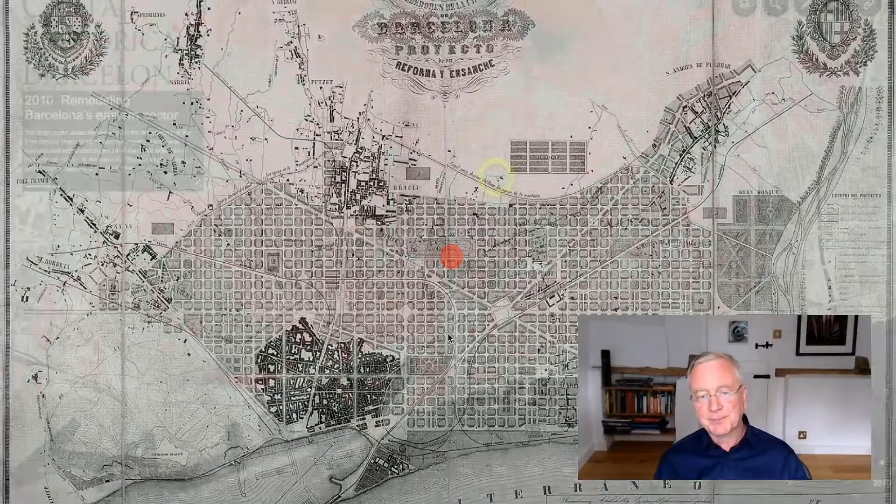If we look today at the city of Barcelona, we find they have pursued faithfully that plan, at least in terms of block layout and chamfered corners, although nowadays almost every block is built on all 4 sides, and the public space has become private, if it exists at all. Sometimes it's built completely. But again, you see the position of Sagrada.

When Sagrada started, when the devotees of St. Joseph, a private organization, decided to build a church in 1878, this area was light industrial, slightly agricultural, and had virtually no construction. It was not yet incorporated into the city of Barcelona at all.

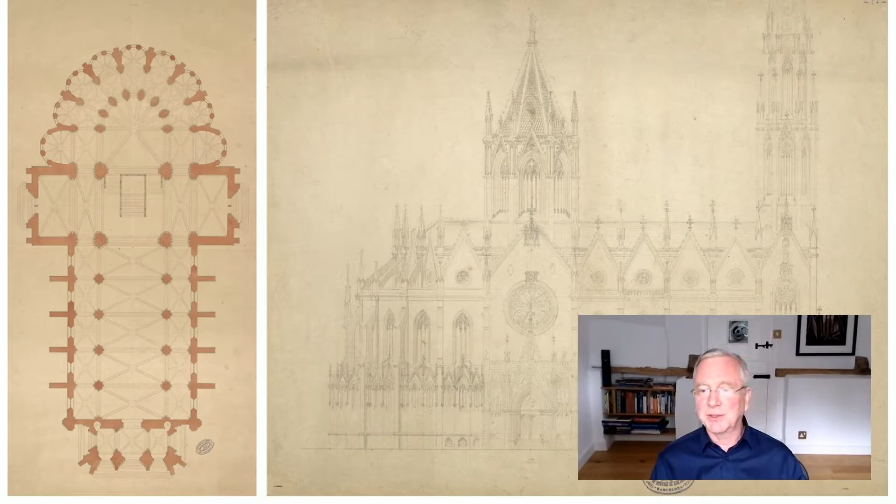The devotees of St. Joseph originally employed an architect called Villar, who designed for them a very classical Gothic church, fairly sizable but not enormous. That church started construction, and the crypt was built to the extent you see before you today, when in 1882 Mr. Villar and his client had a disagreement and he resigned from the project.

Whereupon the client, the devotees of St. Joseph, took the extraordinary step of appointing Antoni Gaudí as his successor. At that time, Antoni Gaudí was only 30 years of age, and the only thing he'd built so far in his career was this glove stand for the World's Fair of 1878. So they decided to entrust their amazing project to this unknown architect.

Of course, Gaudí went on to become one of the most famous architects in early 20th century Europe. This is the house he built for his patron, Mr. Güell, Palau Güell, for example. This is a shot of one of the outbuildings at Park Güell, which was an experiment in urban living - what was the ideal way for the middle classes to live at the turn of the 19th century?

It's probably his most famous individual dwelling, Casa Batlló in the center of Barcelona. You can see here that at that time, Gaudí's style was very closely aligned with the arts and crafts movement, for example in the UK. It was very much about craftsmanship, about decoration, about organic forms and shapes.

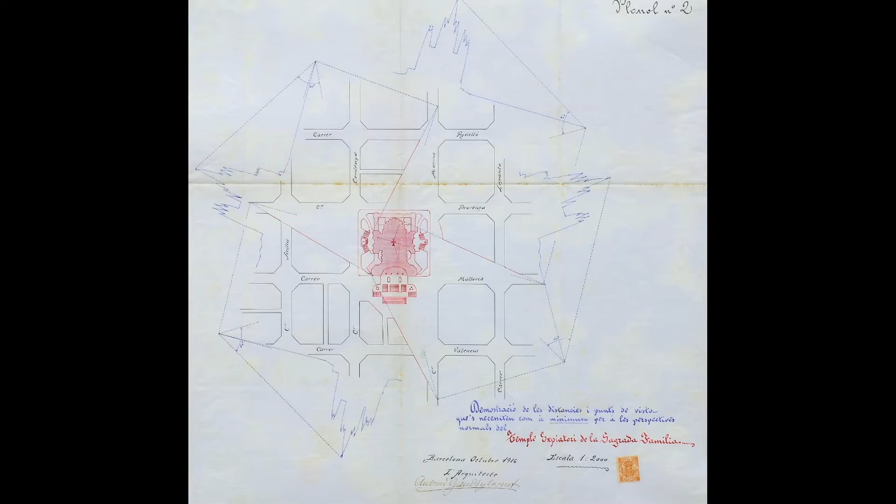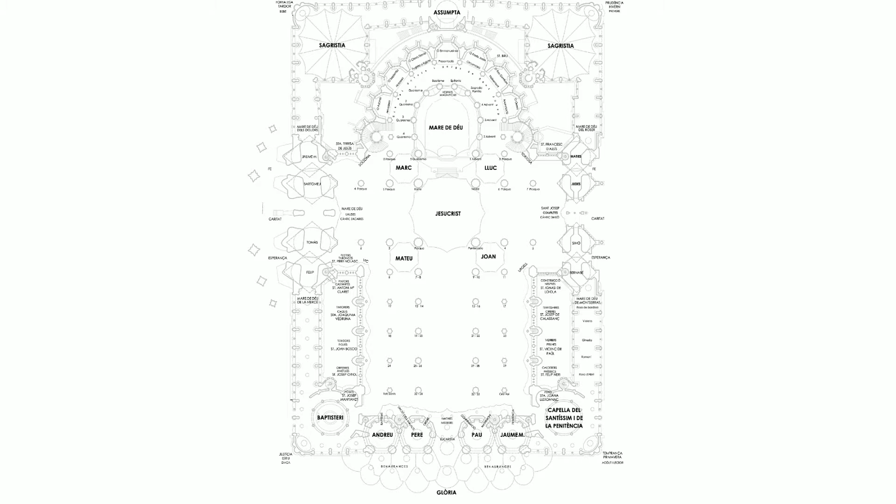This last image is part of the preamble to the church itself, to remind you that I'm used to working at the intersection of architecture, engineering, and construction. But in this case, there is also theology. Every part of the church has a theological meaning, carefully defined by Gaudí, who was very religious himself. So it's no good me going to a meeting and saying we don't need 7 columns, we can do with 4, if I don't acknowledge that there are 7 graces and 7 deadly sins, and therefore there will be 7 columns, whether they're totally necessary or not.

During Gaudí's lifetime, he spent 44 years of his life working on Sagrada. Initially he did other projects as well, some of which I've already shown you. But for the last 20 years of his life, he really did nothing but Sagrada. He was totally dedicated to it.

Here you see the nativity facade in all its glory. This, of course, is a modern picture, and it shows a lot of sculptures and decorative work that weren't there in Gaudí's days, but the basic configuration, the storytelling, the sculpture, and the presentation of this amazing doorway was entirely constructed during Gaudí's lifetime.

And it has some of his wonderful quirks. You probably can't tell, but under the left-hand pillar there is a turtle, and under the right-hand pillar there is a tortoise, and that's because the sea is to the left and the land is to the right.

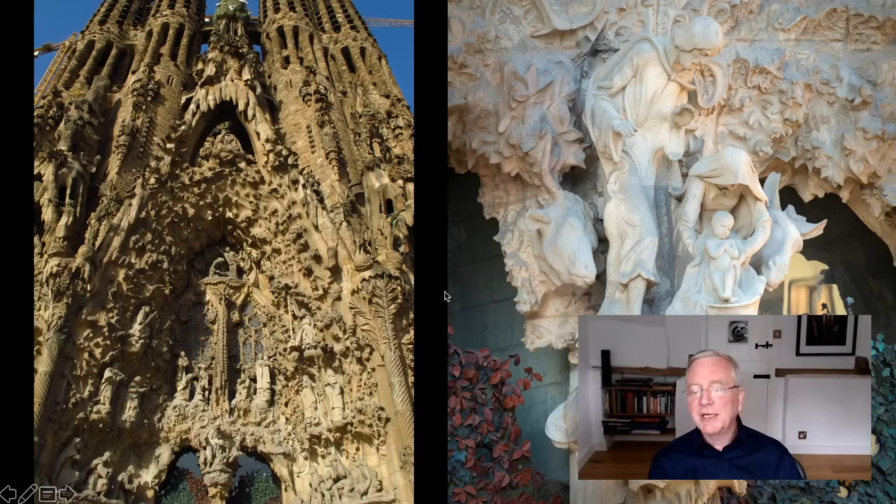Of course, it's a combination of a classical representation of the nativity, as you see the birth on the right, but also the carving of the stone is meant to represent life emerging from the primordial mud. So it is life in all its guises that are represented on this doorway.

And the work continues to date. This doorway here, these bronze doors were only installed three years ago. They're the work of a Japanese sculptor named Mr. Sotoo, who joined the team in 1978 as a stonemason, learnt sculpture, and is now head of the whole decorative arts project. One of the things I noticed about Sagrada, even in my own team, is the challenge of adding to this amazing building. It causes people to do special things that I think they might not have done otherwise. Mr. Sotoo here is a good example of that.

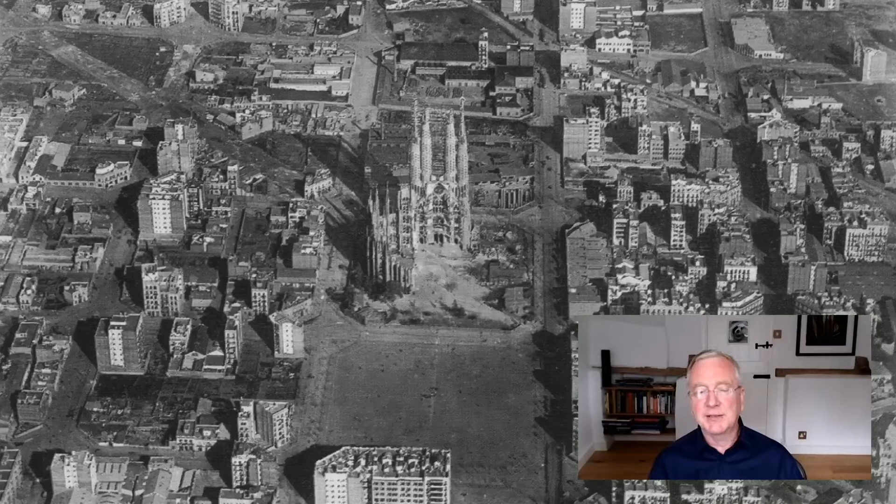So when Gaudí died in 1926, this was the state of construction. As I said before, the apse on the left, nativity facade at the back. And you can see that the Eixample itself is now also coming into being, not completely, but in part around the church itself.

Then in 1926, on his way to Evensong—he went to pray every day—Gaudí was unfortunately struck by a tram and died on his way to the church to make his prayers. By that time he'd become totally ascetic, living more like a tramp than as a member of the middle classes. Even though he had his own villa at Park Güell, his habit was to sleep in the church itself at his design desk. It was actually 2 or 3 days after he was killed that he was recognized as the famous Antoni Gaudí and recovered from the morgue, from the Paupers Hospital, and given a state funeral.

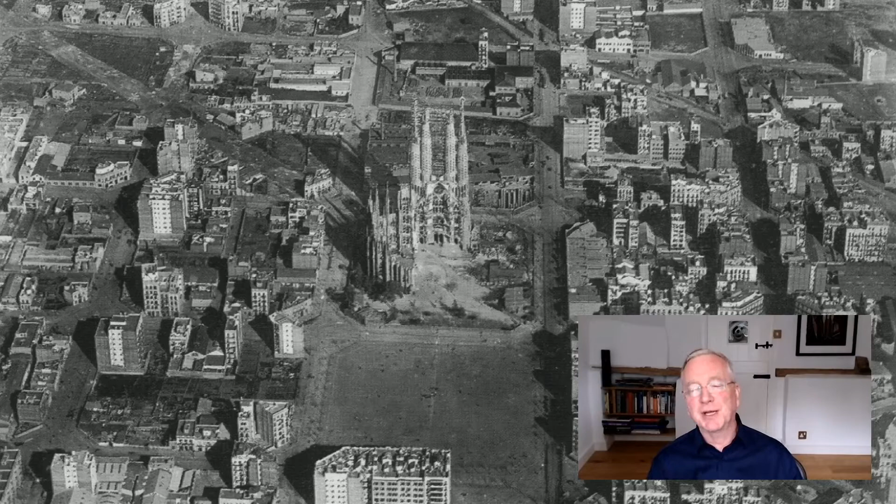It's always been a bit of a puzzle to me as to why he built so much of the church, or so little of the church if you will, from the ground to its pinnacle, rather than the more conventional approach of building a bit of everything. It could be that he wanted to make sure everybody understood his design intent by completing complete parts of the building during his lifetime. Or it could be, and possibly more likely, that the whole of the church has always been funded by private donations, and he simply wanted to make the best possible advertising hoarding to help create the money flow that would be needed to complete the building after his death.

Then in the Civil War, prior to the Second World War in Spain, most unfortunately, the building where all the designs and documents and these plaster models - Gaudí worked a lot from plaster model scale models - were blown up by a bomb. So a lot of the documentary evidence of Gaudí's intention was apparently destroyed.

Fortunately, a good deal of the plaster models have been painstakingly glued back together again, and this process continues today. There are model makers in the basement of Sagrada still trying to figure out how little bits of smashed plaster fit back together again. A lot of the documents were recovered because they had been published either in other exhibitions or in works to do with the fundraising exercise, and those documents were repatriated. So we actually ended up with a fairly good idea of Gaudí's design intent.

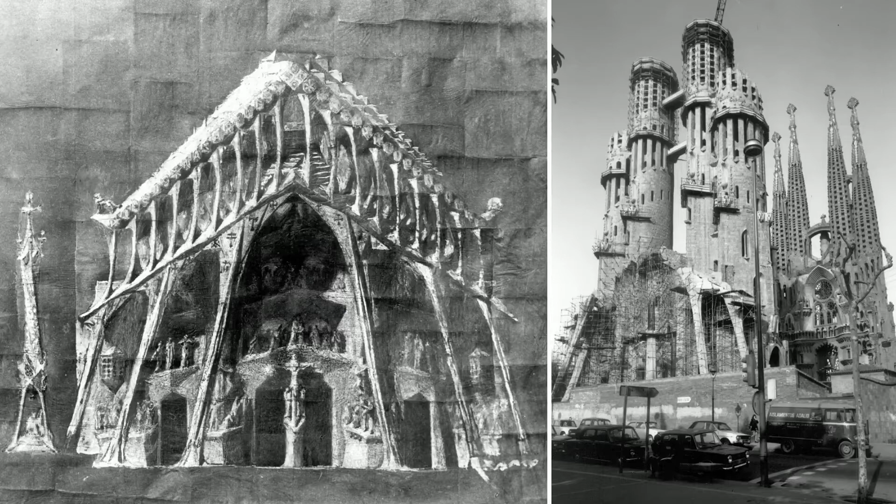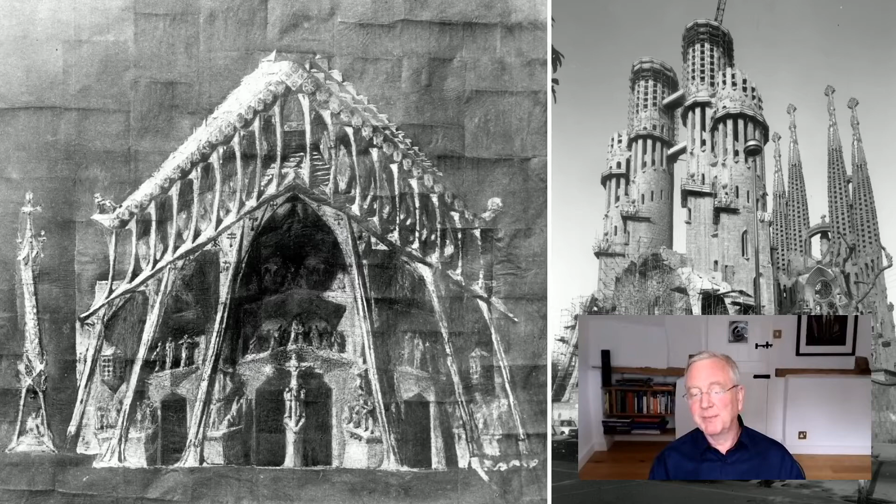Construction didn't start again until the 50s, after the Second World War - another period after that period of unrest, if you will. They started on the western facade, the Passion facade, alongside the nativity facade. This facade is in absolute stark contrast to its mate on the other side. One is totally about life, and this one is the opposite - the west-facing facade is completely about death.

Again, it tells the classical story of Christ's death, but represented more by bones, if you like, a skeletal approach. It represents death in every other manifestation as well. In fact, although it was started in the 50s, the pediment of this facade was only put on about 5 years ago, and the cross, with the two sculptures on the left and right - the lion and the lamb - were only put in place last year.

This was the story I referred to earlier. You'll notice on these wonderful sculptures by a Spanish local sculptor called Josep Subirachs, in his sort of cubist fashion, that the helmets of the soldiers, both on the horse to the left and facing you in the middle, are actually modelled on the chimney pots of Casa Milà, in a sort of act of homage to Gaudí himself.

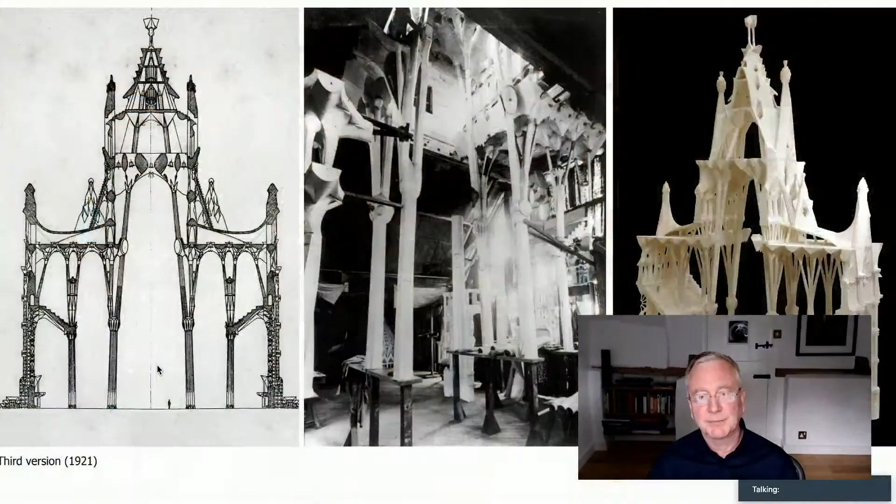This model is not actually of Sagrada Familia at all. It's of a church or chapel proposed at Colonia Güell, another undertaking to find the ideal way of rural living outside Barcelona. The only part of the chapel that was built was the basement, and this is it—the basement of the chapel at Colonia Güell.

I think Gaudí was using it as a vast experiment for Sagrada Familia at the expense of his client, Mr. Güell, because every single component seems to be an experiment in different materials as well as geometry. We have brick columns, concrete columns, columns made of single pieces of granite, columns made of single pieces of basalt, and in the end a fairly confusing, discombobulating space, because none of the columns are upright.

They all incline in different directions in response to the load path coming from the church above, which was never actually constructed. I think Gaudí learned from this, so in his third and final design for Sagrada, he achieved a perfect cross-section from a structural point of view, with all loads brought down properly and the columns branching in free space as they rise to pick up different parts of the building above. In the other direction, he simply repeated this two-dimensional structural diagram at regular intervals, imposing a grid of 7.5 meters in both directions, and vertically, to produce a sense of order in his final construction.

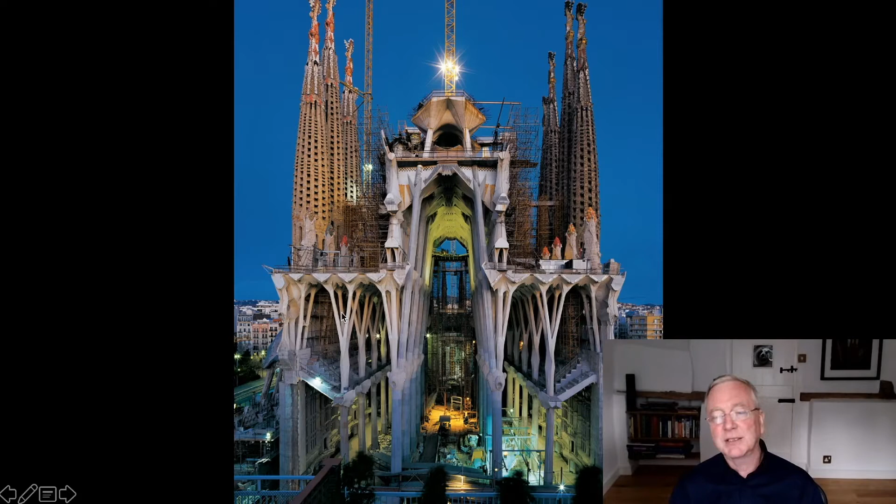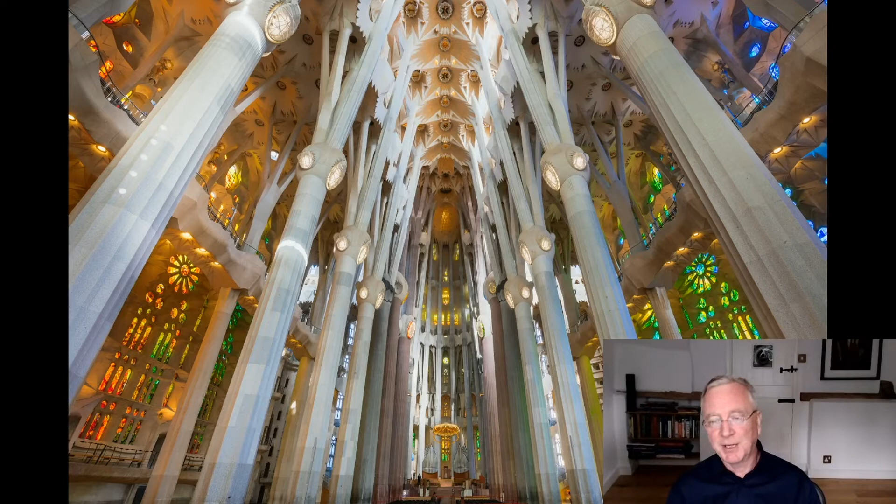This is the nave under construction in the late 20th and early 21st centuries. You can see it marching toward you in its regular, repeatable cross-section. It was completed in 2010, when it was consecrated by the Pope, and the whole church became fully enclosed.

From my experience, this is the most uplifting and amazing space I've ever been in. The sense of verticality and light coming from the top of the church is incredible, achieved also through the stained glass. On the right, the stained glass is in cool colors—green and blue—for the eastern facade, where the morning light comes in. On the left, it's in warm colors for the afternoon light, so the church changes its character completely during the day. The upper levels of stained glass are crystal clear, not colored at all, introducing the idea of light at the top of the building and a sense of verticality, drawing your eyes upward.

At the same time as Gaudí took on structure, he also took on geometry. Every part of his third design for the church is made from a ruled surface—a surface with straight line generators—either a hyperboloid, shown here on the left, or a hyperbolic paraboloid, which we'll come to later. In the ceiling of the nave, on the right, all those vaults are hyperbolic paraboloids. The straight line generators are represented in the tiles and also in the decoration, so the little teeth hanging down are not arbitrary.

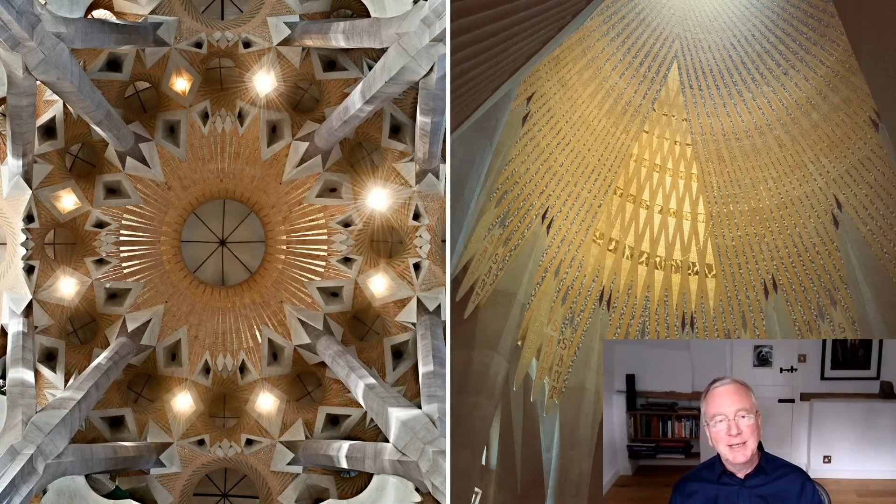Here you see examples of this on the ceiling. On the left is the big hyperboloid at the base of the main tower, which we'll be talking about later. On the right is the elegant hyperboloid at the bottom of the Mary Tower, the front tower sitting on top of the apse, which is also the golden triangle here, also made from the generatrix, representing God, his or herself.

And here's a ceiling plan, a reflected ceiling plan, or a photograph of the ceiling, where you can see on the left the back of the Passion facade, on the right the back of the Nativity facade. Down the page you can see underneath the big Mary Tower and that triangular representation of the Supreme Being, and up the page is the main nave, which eventually will get to the Glory facade, which we have yet to design.

So that's the state of play as of 6 years ago, in 2014, when Sagrada came to London and approached us at Arup and asked for our help, or whether we were able to help. And they wanted help with three different aspects of construction, if you will.

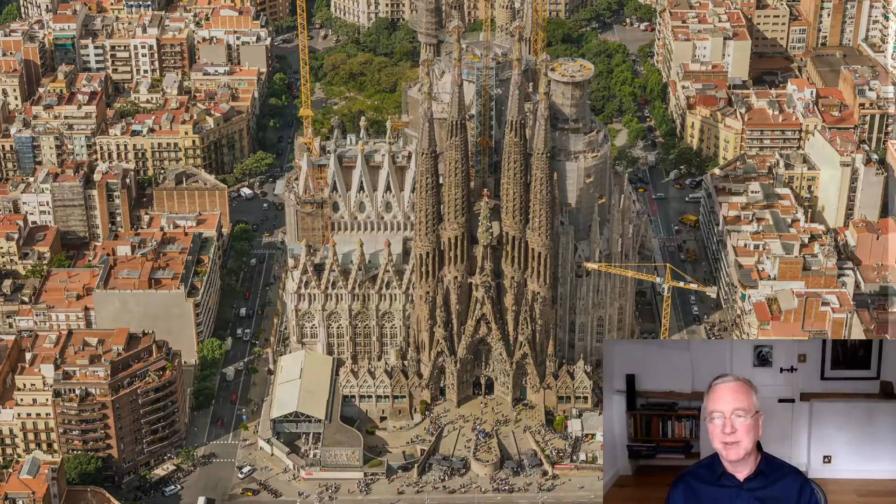The first is that at that point, 60% of the building had been constructed, about 40% was yet to be constructed, and yet they'd set themselves an ambition to complete the church by 2026, which was only 10 years away. And these are all the parts yet to be built.

The two sacristies at the north end that you see there, the main Mary Tower, which is standing above that representation of God, but it also stands directly above the original crypt for Villar's Church. The main nave roof and this room at the bottom of the main tower called a crossing, the bases of the evangelist towers,

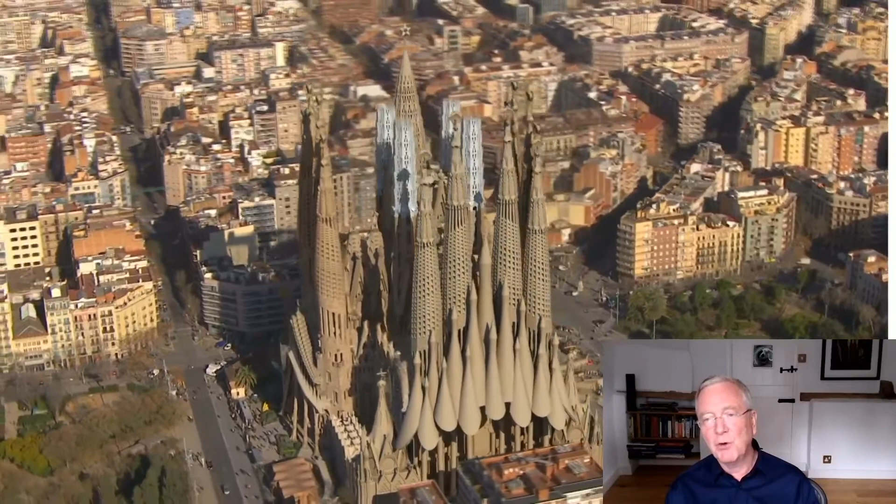the pediment on the Passion facade, which I've shown you is now already complete, the baptistry on the left and the penitent's chapel on the right, the main Glory facade and its amazing canopy hanging out over the street at the south of the church, 4 more bell towers representing the completion of the 12 apostles, the 4 evangelist towers surrounding the main tower dedicated to Jesus Christ himself, crowned with an accessible cross.

And when the building is finished, it will be 172.5 meters tall, a multiple of 7.5 meters that I referred to earlier, which will make it the tallest building in Barcelona, the tallest church in the world, but 1 meter less tall than the hill at Montjuic, because Gaudí thought it was rude to challenge God and he would stay just slightly deferential.

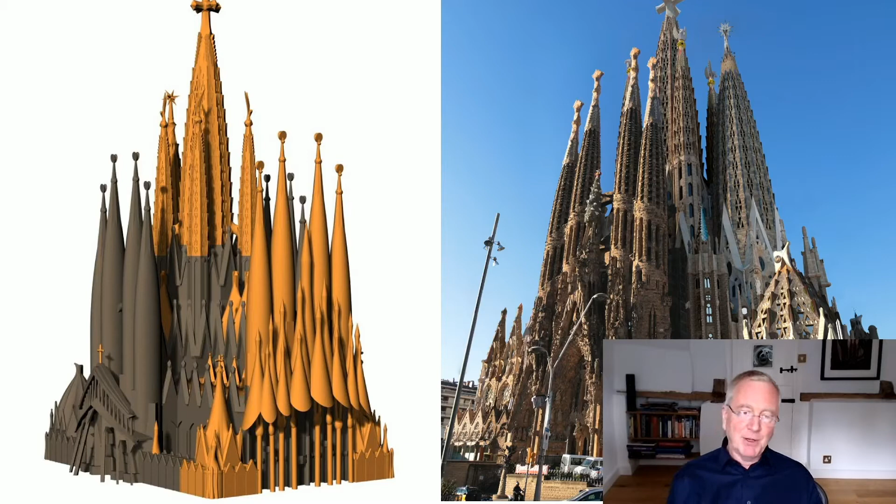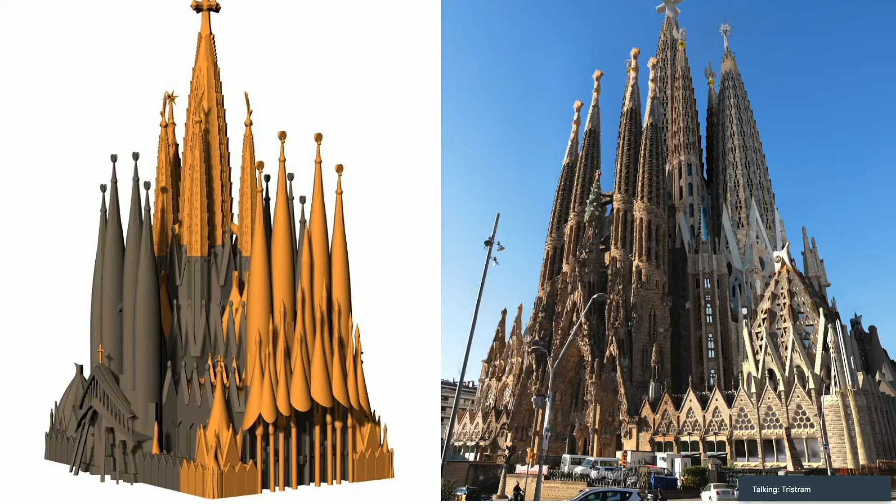So our challenge basically was, can we build the remaining 40% of the church in 10 years, which roughly means speeding up the rate of construction by a factor of 10, at a time when site access becomes increasingly limited, and at a time when we still need 4 million visitors every year to come and buy their entry tickets, because that will pay for the construction. So the construction has to proceed while visitors are attending and visiting the church underneath.

That was the first part of the challenge. The second part of the challenge is that the Mary Tower, as I said before, sits above the crypt and therefore had to be only of a certain weight, because the foundations of the crypt never envisaged the mass of the tower that Gaudí proposed to put on top of it. It was founded for the much smaller Villar Church.

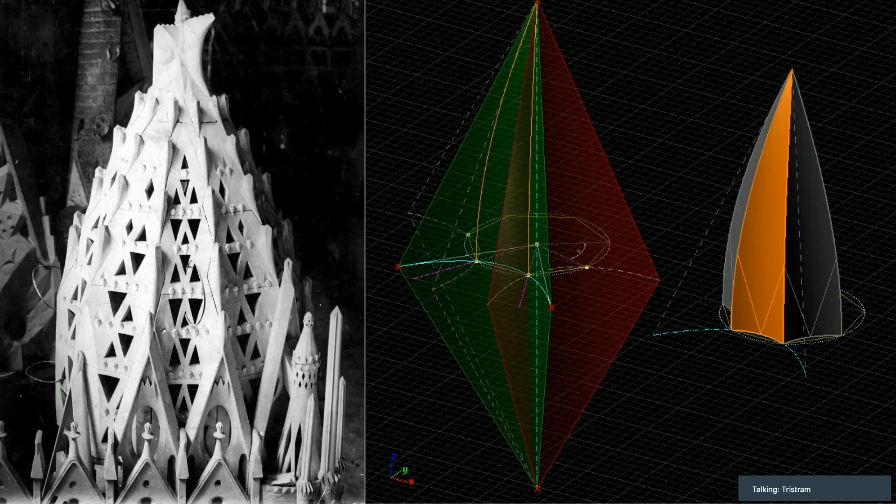The geometry of the Mary Tower can be extrapolated because one of the plaster models that has been recovered and reconstituted was for the sacristy you can see in front of you. And the geometry is actually the hyperbolic paraboloids rotated about a central axis and then intersected to form the shape you can see on the right.

We can now use our newfound skills in the digital world of Grasshopper and Rhino and take that form for the sacristy and simply extrude it into a taller, more multifaceted shape for the Mary Tower, as you see in front of you. The architects and designers at Sagrada were pioneers in the digital world, adopting digital techniques from the early 1980s onwards, partly under the influence of an Australian architect, Mark Burry.

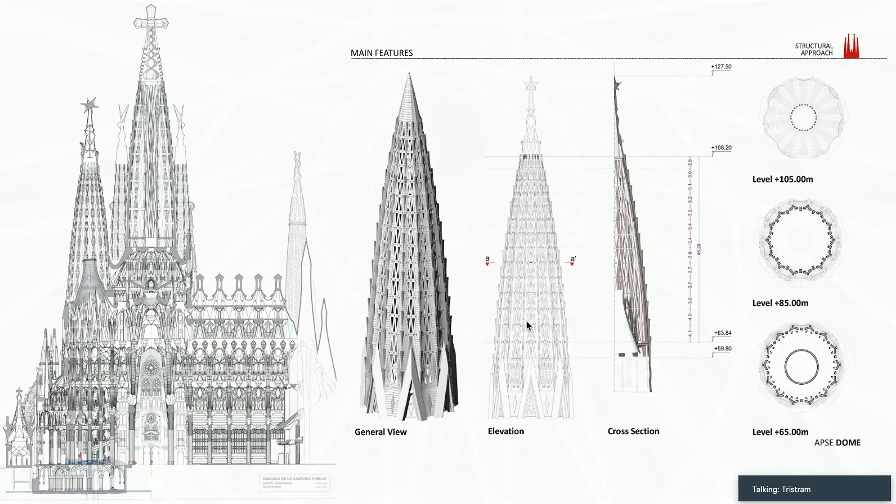So we know what shape the Mary Tower is, as you can see in front of you. But the question is, what can we make it of, and how can we make it both quick and lightweight? The proposal brought to Arup five years ago was to build a steel tower and clad it with lightweight cladding panels that could be made to look like stone on the outside.

The third part of the challenge was to remain true to Gaudí's intent. This is a continuing debate: how do you continue to reinterpret such an amazing genius and stay true to what he intended? Some people say we shouldn't attempt to complete the church because it will never be as Gaudí intended. But Gaudí himself wrote that he expected the church to be completed by future generations, so I don't think that's necessarily the right approach.

But there is always a debate. What would Gaudí have done? What did he intend before he died? What would he have intended if he'd still been alive today? These are always part of our continuing debate.

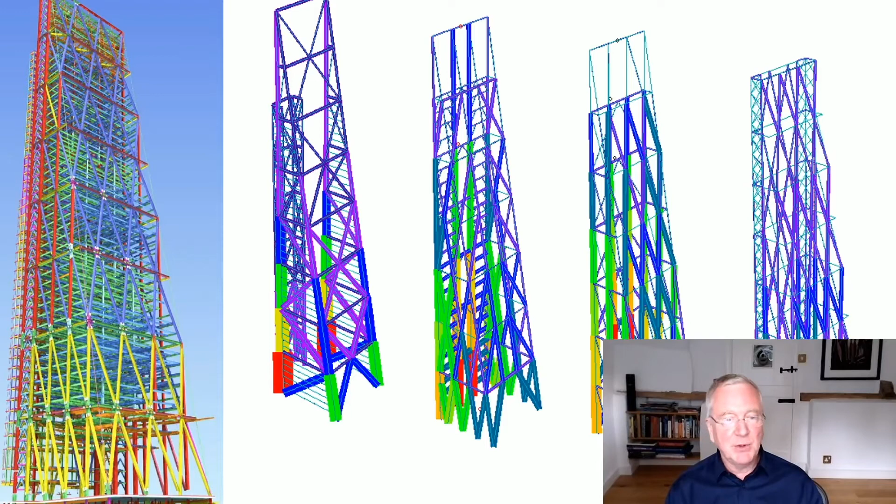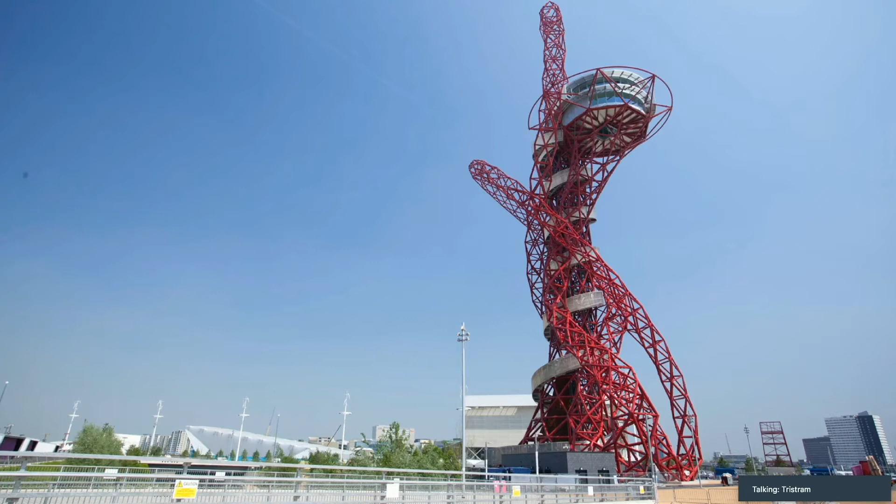So when we took up the challenge, our first approach was to ask what else we knew or could learn that could help us. We knew a lot about steelwork — at Arup, we had just completed the Leadenhall Building, the cheese grater in London, with Rogers Stirk Harbour and Partners, and we had finished the Orbit, Anish Kapoor's sculpture in the Olympic Park, whether you like it or not.

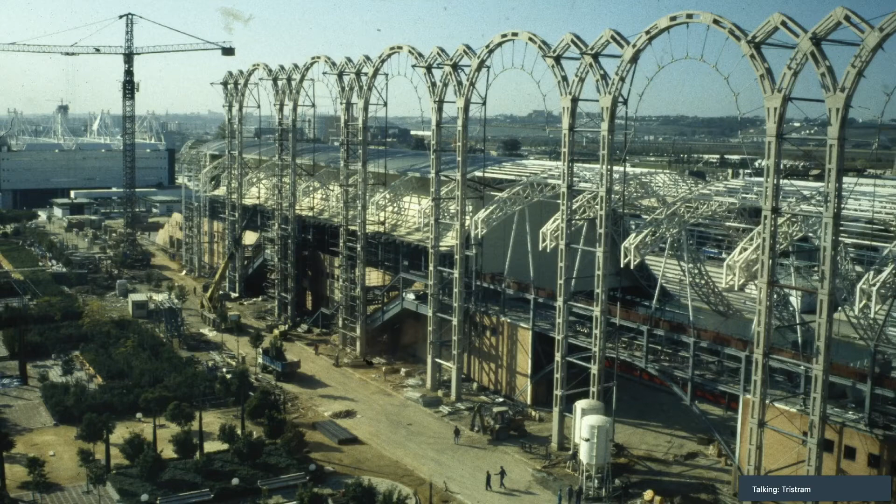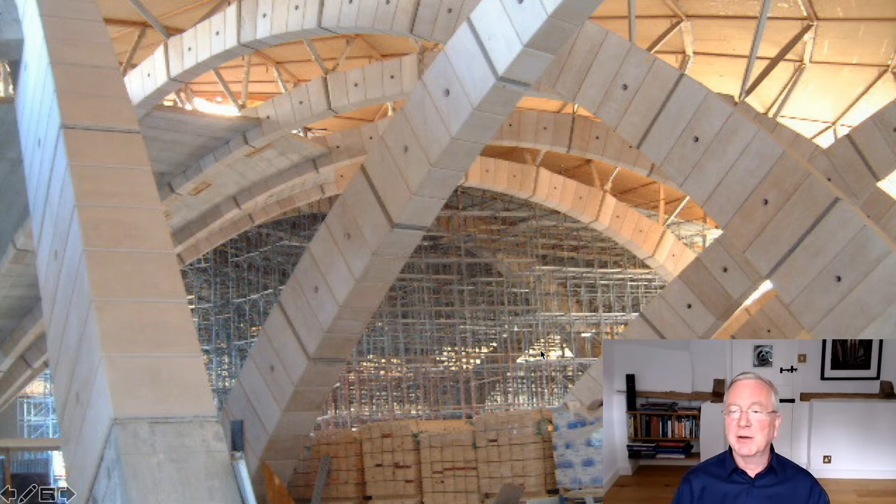But we also knew a bit about using stone in a load-bearing capacity. This facade was for the Pavilion of the Future at the Seville Expo in 1992, which I'd worked on earlier in my career with Peter Rice. And we'd designed a church with Renzo Piano called Padre Pio, which also used post-tensioned stone — you can see the holes in the stone, because steel cables are actually inside, post-tensioning it to form these wonderful arches.

So we had some ideas that weren't necessarily about using just steel. What do we do with those ideas? What I normally do, and did in this case, is experiment with computer analysis, or simulation — asking 'what if' questions all the time.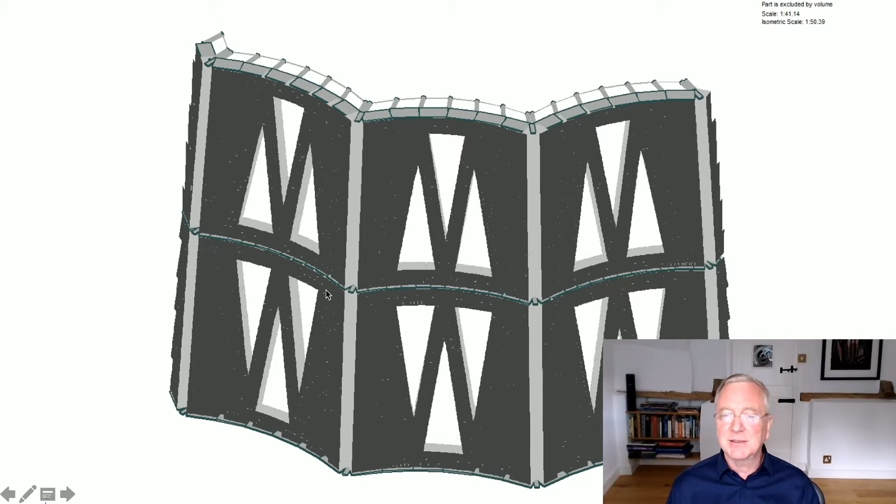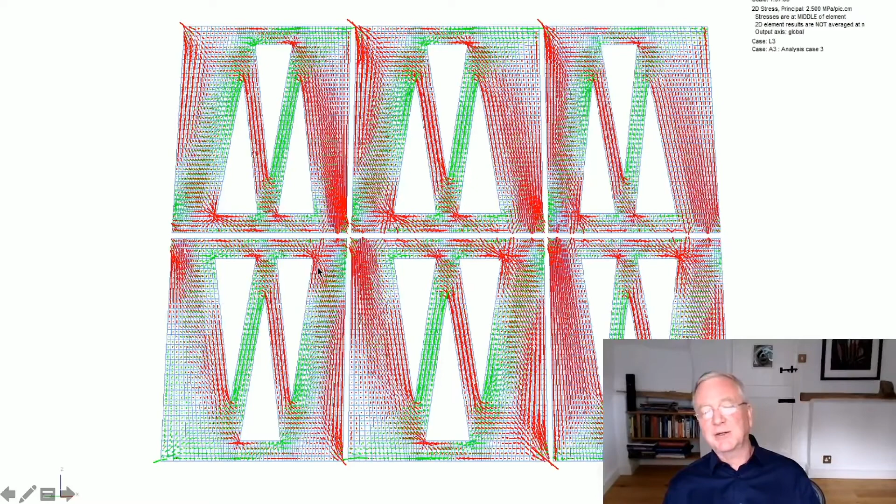At the end of a month of experiments, we concluded that if we made the tower out of stone panels — this is a part near its base — then if the wind blew, these are the stresses you'd get. The green is compression, which masonry loves; the red is tension, which masonry can't stand, because it simply opens up the joints between the stone blocks. So if we just used ordinary stone masonry, made to the right weight, meaning quite thin panels, there's not enough weight in the tower above to hold it down when the wind blows.

But if we also introduce steel rods inside the stone and post-tension it, clamping it together with pre-established forces in the steel rods, we can introduce compression forces in the stone that look like this. Now when the wind blows, there are only very modest areas of tension that we don't really need to worry about — these might crack some mortar joints in an unnoticeable way, but won't threaten the structural integrity. So this is the proposal we took to Sagrada.

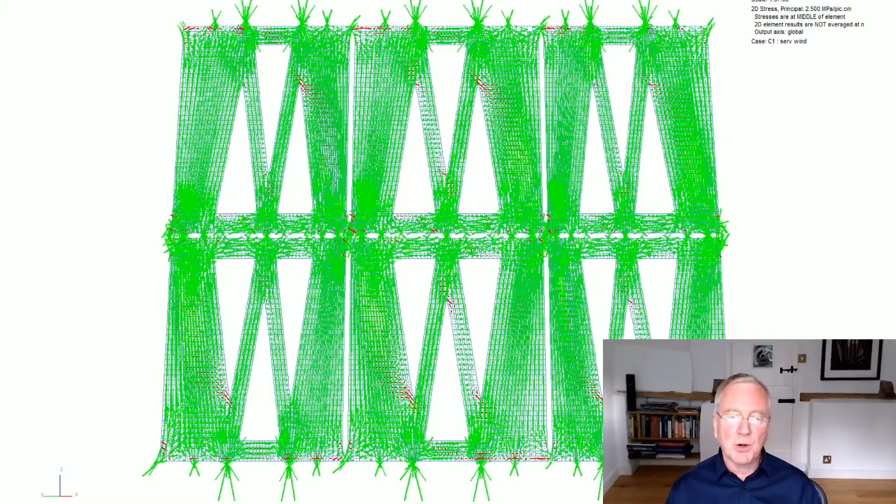We said, what can we do, or how can we approach it using post-tension stone panels, which we can make off-site and assemble on-site to speed up construction, to do minimum work on-site so we don't interfere with the visitors down below, and to use less stone and keep the weight of the building down.

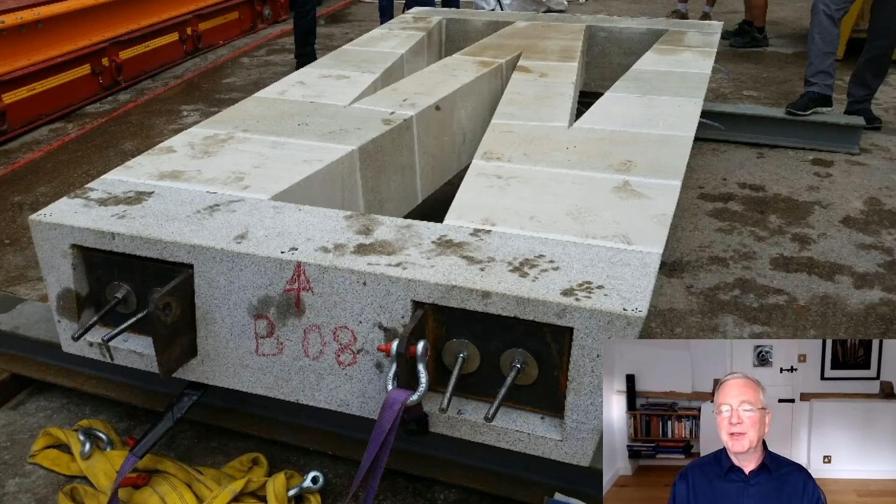And the wonderful response from Sagrada, because they're also the builders, is within a month they made a panel. They thought, well, what's it like to build? Do we like it? Do we enjoy carving up bits of stone or cutting stone blocks and clamping them together with steel rods that you can see here?

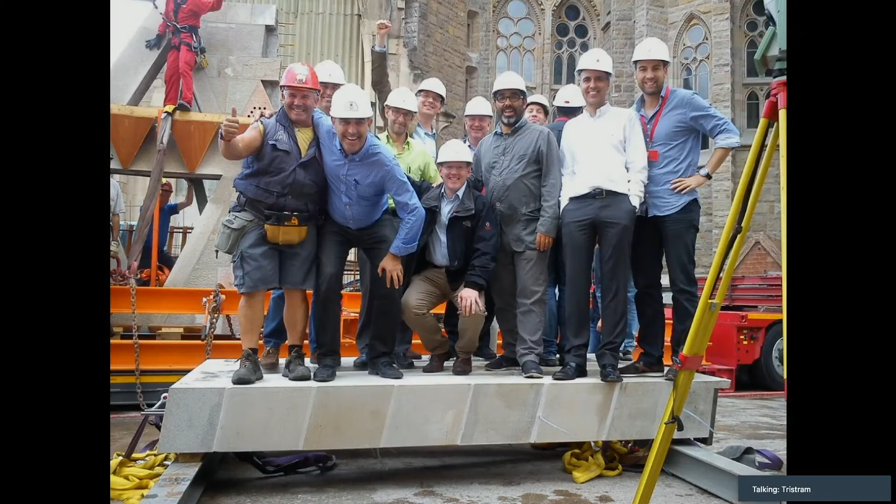And so we made a piece. We brought it to site to see how it looked, in context of the church itself. And you can see from this shot that the answer was everybody was delighted. Second from the left is the builder, the man in charge of construction at Sagrada, and he was overjoyed. He thought this was going to make his life much simpler.

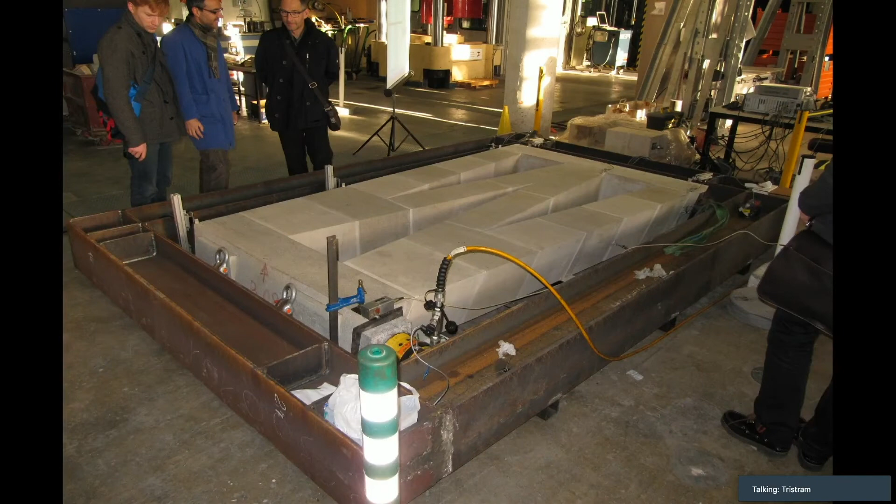The other advantage of making a mock-up or a prototype is that you can then test it. So here we are testing it with a hydraulic jack in the foreground to see that it does behave in the way that we predicted with our finite element computer simulation.

Very briefly here is, I think, the project I worked on which has had one of the greatest levels of collaboration. It might be because there's a bit of a language barrier between ourselves speaking English and the local team who like to work in Catalan. But it might also be because everybody is absolutely focused on the quality of the outcome and nothing else really matters.

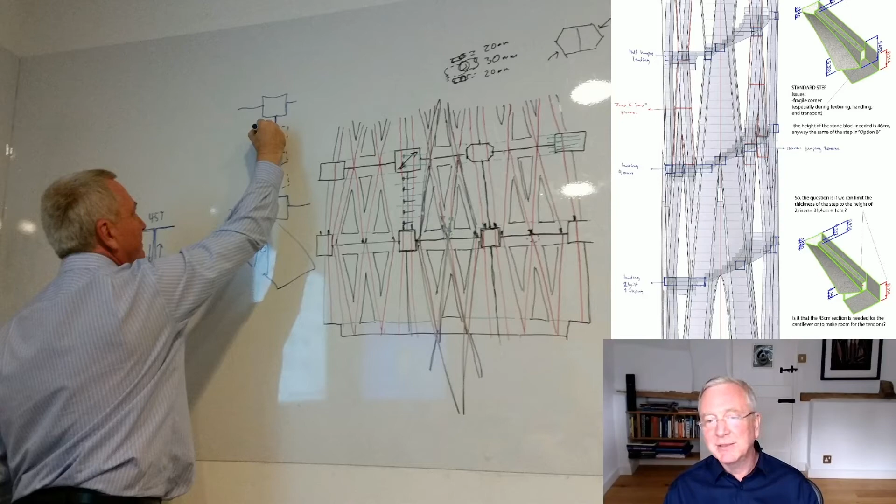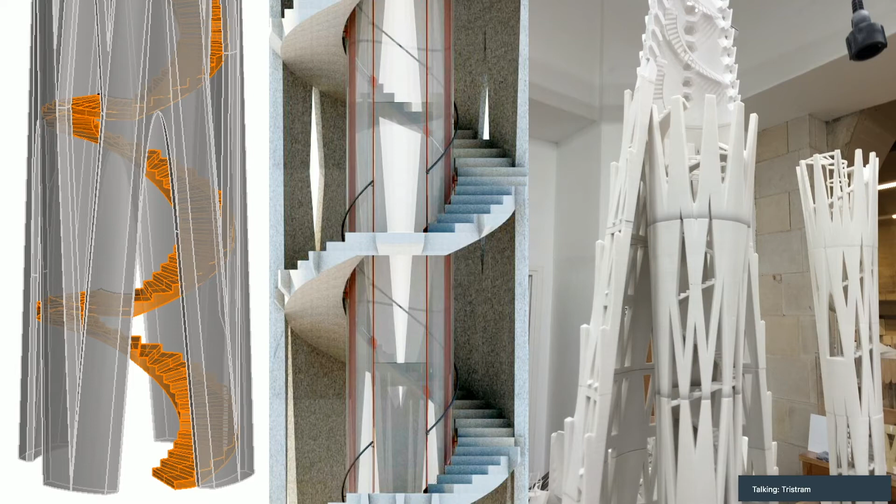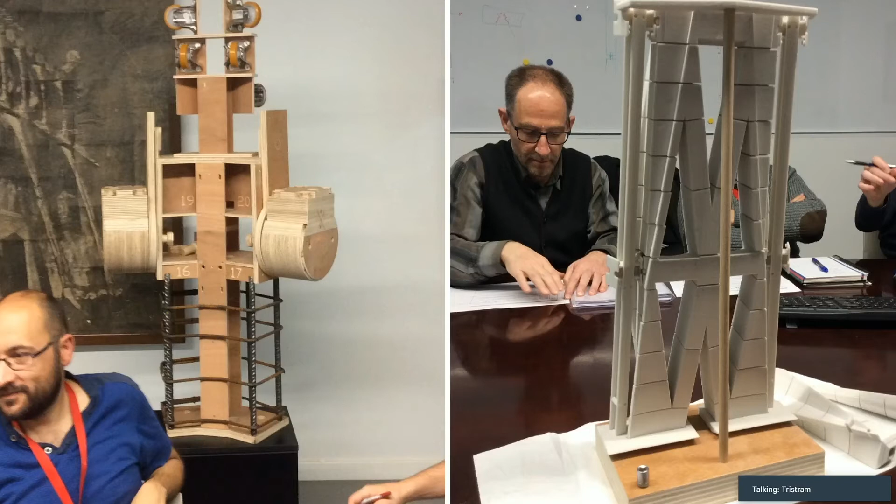Every time we go for a workshop, there are new models made. We made computer models representing the way it should be constructed, stages of construction. The builder made the model on the left to see whether he could get his hand in to do those bolts up. So he's making a model using form ply.

And on the right is a model made by the architects where every piece of stone is individually modeled as a plastic block from the rapid prototyper, the 3D printer. And then there's actually a steel rod in the middle that holds it together. Now, I think they were just checking that our structural theory was real, and that this was a valid way of making stone panels.

And then lastly, this is a sketch by our project director, Steve McKechnie, articulating how things could be put together, how details worked. And what I love about this is that this sketch is entirely done digitally. This is done on an iPad in his own idiosyncratic style. And the point of all of this is what I like to tell people, you have to be able to communicate to be a successful collaborator.

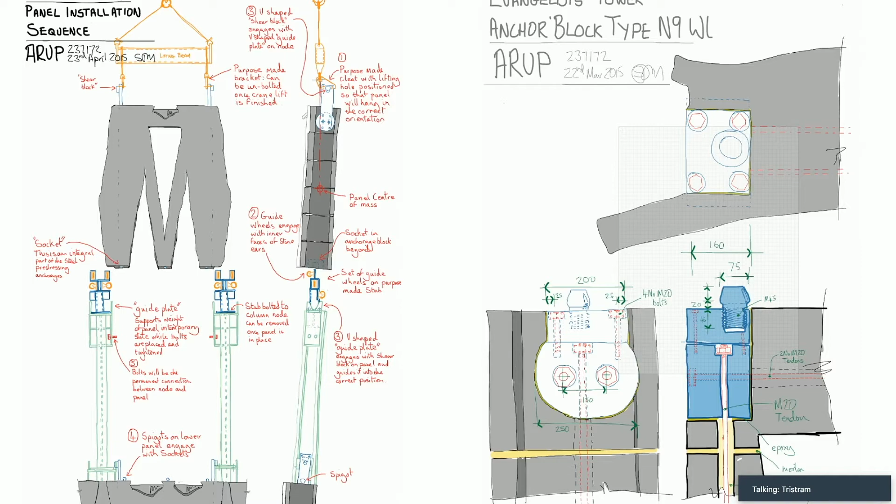But how you communicate is up to you. My generation tend to say you have to do it with a felt pen. And I'm trying to say, no, there are multiple ways of communicating. The point is simply that you have to communicate.

So finally, then, we have our proposal. What are we going to do? In the modern world, we can do all this in the virtual world first. So we can build completely accurate models of what we want. Every component is present to the nearest fraction of a millimeter, the stone, the steel rods, the anchor blocks.

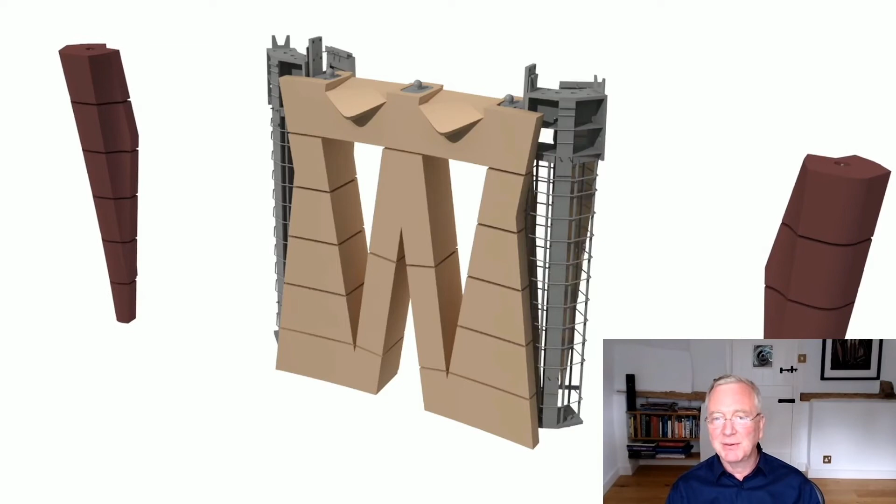This is a typical panel that makes up one of the evangelist towers. We introduced steel columns in the corners, not strictly necessary, but they helped a lot with construction. Those are the steel anchor blocks. Those are the steel post-tensioning rods. And there you see the panel itself.

And then for real construction, you start with great big blocks of stone that you've taken out of quarries from all over the world. The original stone of Sagrada all came from a quarry at Montjuic in Barcelona itself, but unfortunately that was closed for environmental reasons in the 70s. So now sandstone that looks similar is sourced from all over the world.

And then we cut that stone using a computer-controlled diamond-tipped bandsaw. This one actually isn't one of our saws, but it shows you the technique very, very well. And so you get this bandsaw, you can manipulate it in space, water jet it to keep it cool, and it cuts the stone.

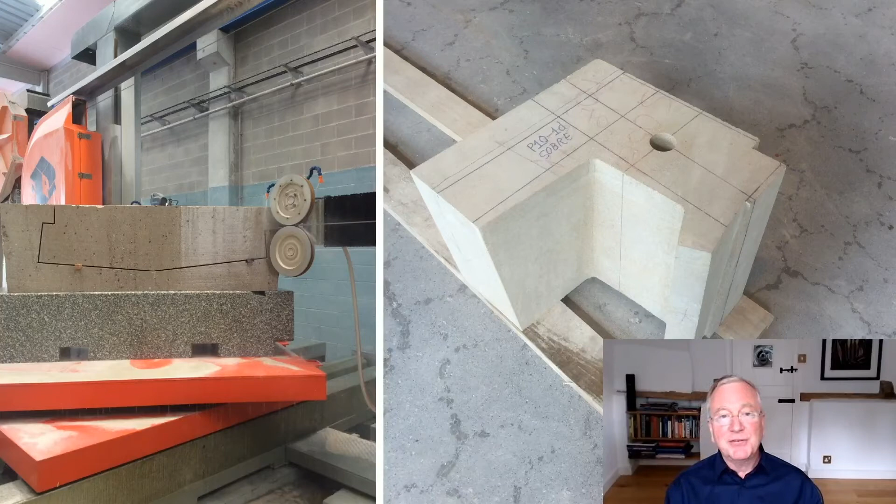In our case, we use the bandsaw on the left. It does the same thing, but it uses a computer-controlled turntable that reorients the stone down below. The point I'm trying to make is that this will cut any stone to any shape, provided it's a ruled surface. I think it's wonderfully coincidentally beautiful that the technology we use today is in perfect harmony with Gaudi's geometric approach from the 1920s.

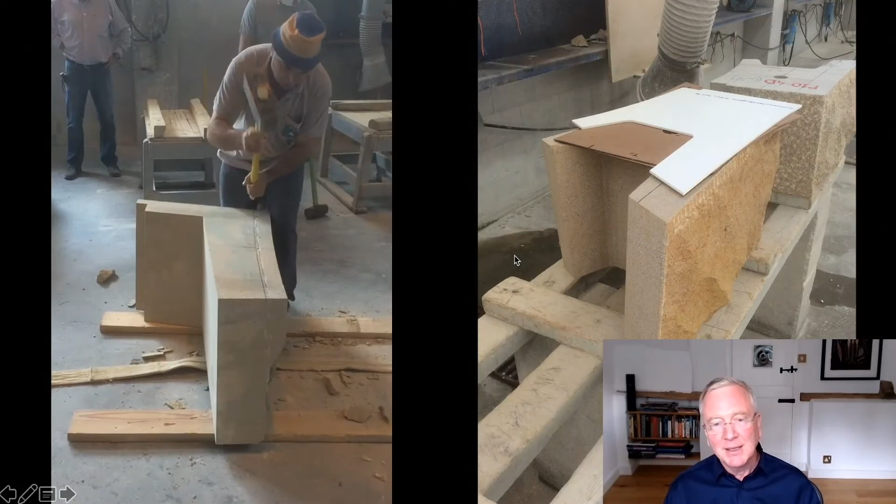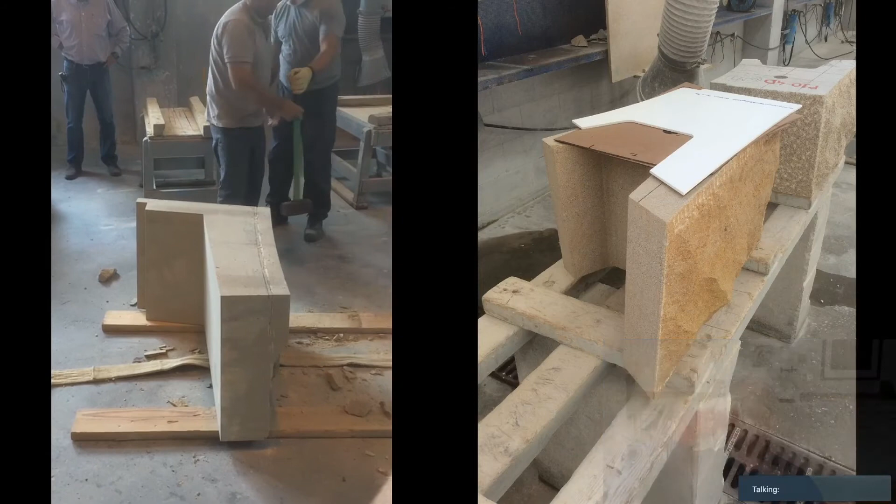Then once the stone is made, we get this. In time-honored fashion, the front face of the stone is split from the main stone, so we get this beautiful hand finish, which is absolutely consistent with the rest of the church, or indeed with any cathedral built from the 1200s onwards. I also like the fact on the right, you can see we're still using cardboard templates, again like we did in the 1200s, to check that we built the right shape.

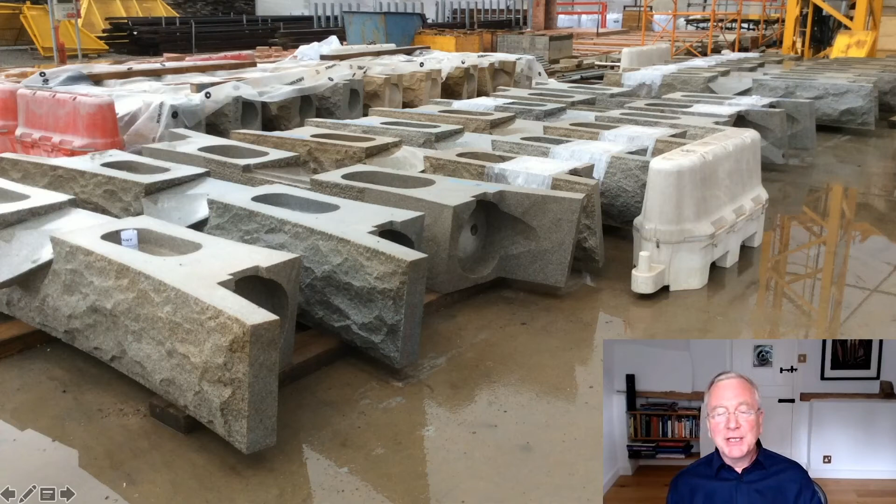And so via this process, we can mass produce the stones. The pockets required for the anchor blocks are carved out using CNC-controlled milling machines, again with complete accuracy.

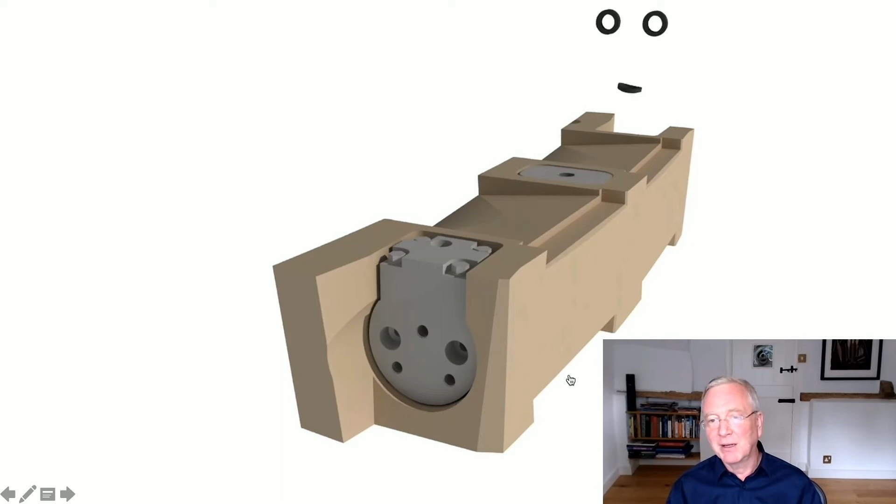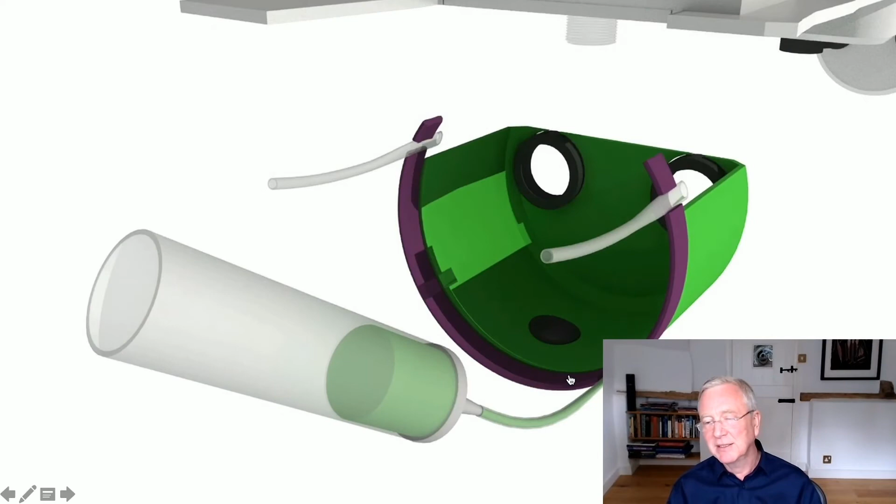And the builder then produced this series of videos. I'm going to show you two of them. This is how to assemble the lintel, the block at the top of the panel, and how you start by placing the anchor blocks. You use a laser cut template to make sure that each anchor block is accurately positioned relative to each other. You then also position the end ones using these plates, which are used as part of construction. The anchor block is then epoxy glued into place, with epoxy injected into the cavity to make sure it's firmly fixed into the stonework.

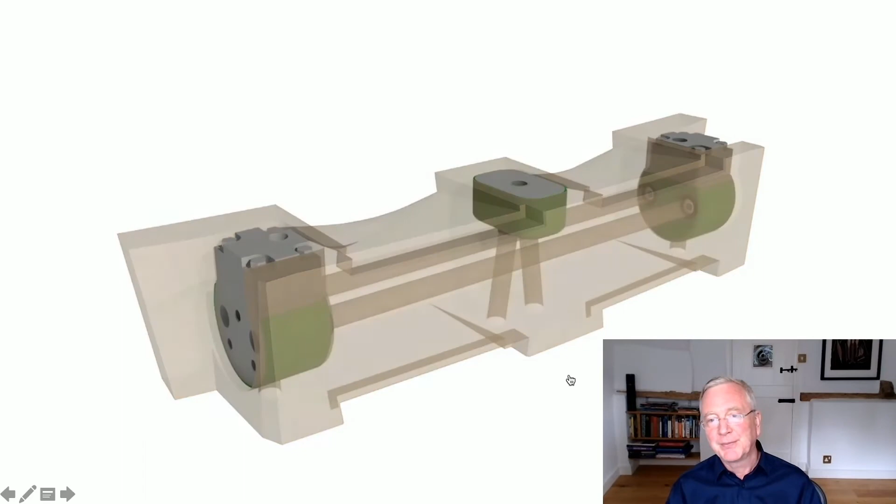All anchor blocks, of course. And this video shows every single step that you have to take to manufacture a panel. This is just a clip from it. You have to bake the epoxy to cure it. Then you can remove the templates that held the anchor blocks in place.

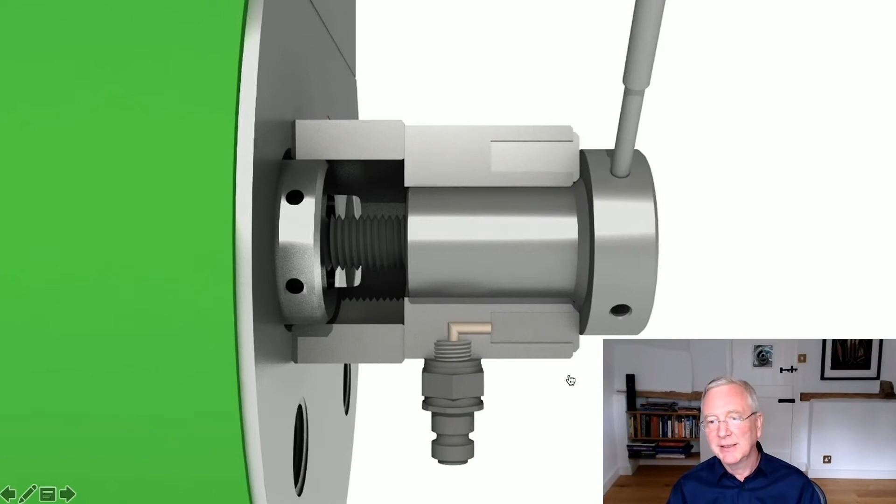You now put in the post-tension rods that you're going to use to stress the stone itself. Along comes the stool for the hydraulic jack, which is then applied and done up. You add the hydraulic coupling, in comes the oil, extends the rod, and then you tighten it using the stool, and then you take the jack off, etc.

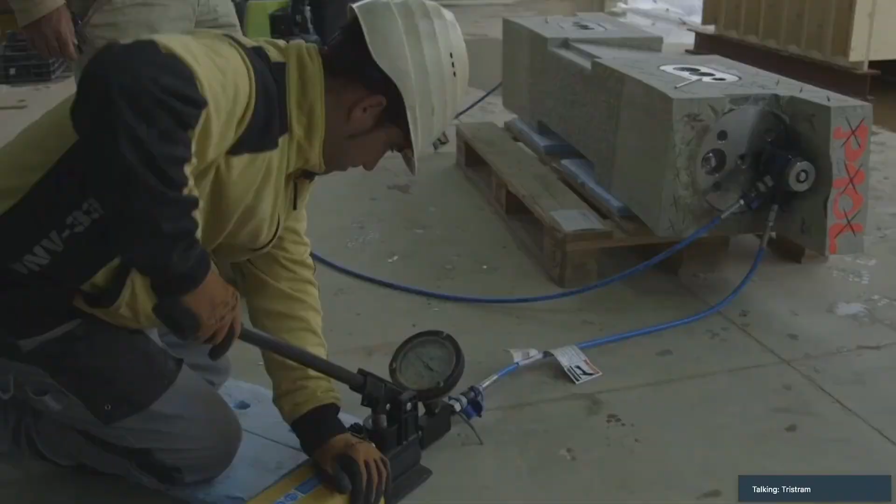So the builder's premise was that if he could put together this quick video showing some of those steps in real life, it follows exactly what the builder intended to do. He said that making those videos forced him to pre-think every step of construction, and it also has the advantage that he can train up more and more people to come and work on site by using the videos as training material.

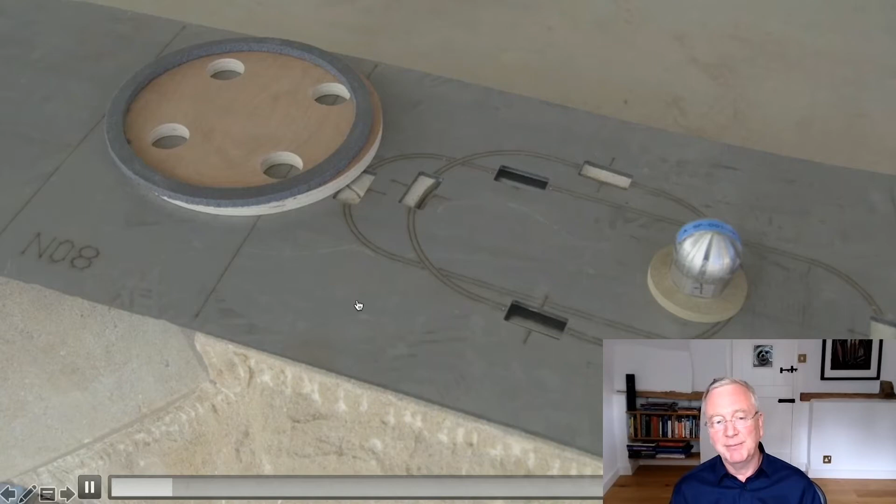And so then you get mass-produced lintels complete with their post-tensioning and anchor blocks.

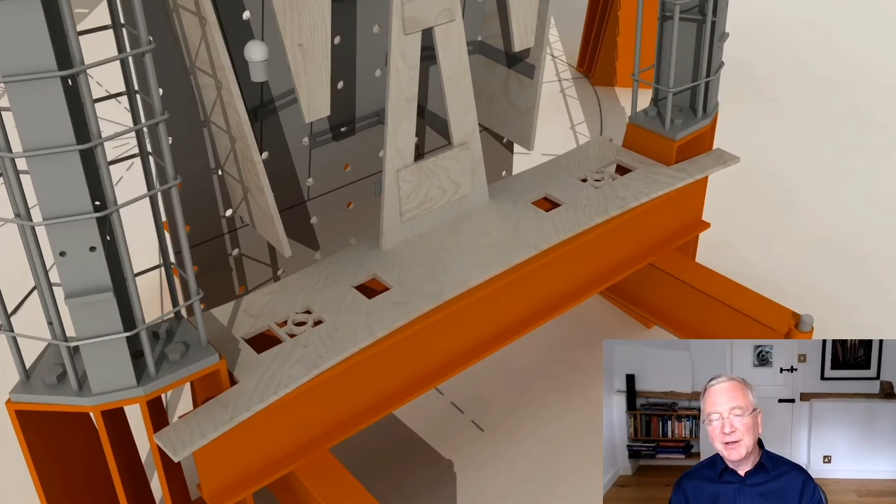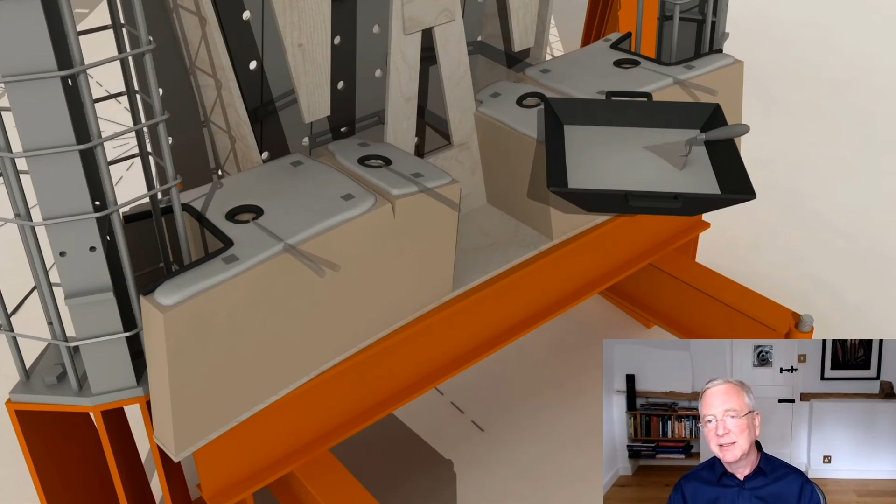The second video then shows what's happening off-site at a yard 1.5 hours outside Barcelona, where jigs have been established in which the actual panels can be assembled from the individual blocks. Here you see the mortar being applied between them. You can see laser cut plywood again being used as templates so that all the stones go in the right place. Again, this is pre-thinking through the assembly process.

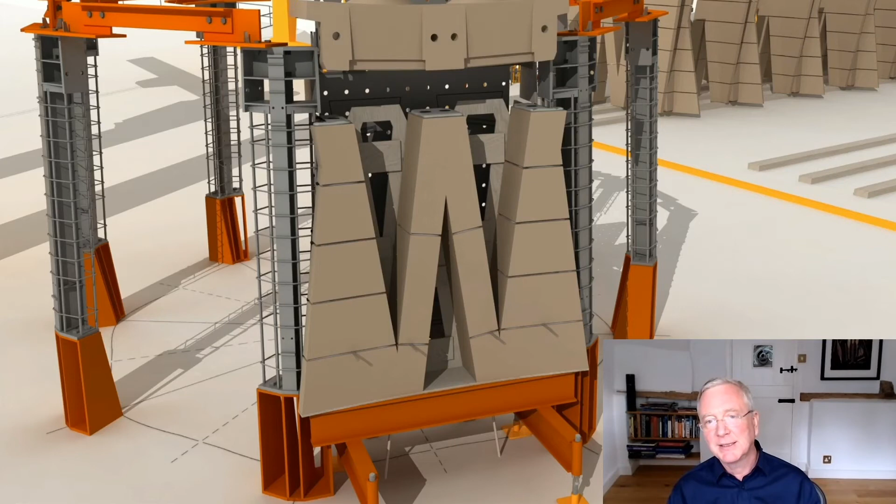There are the rods being inserted into the panels. Those two have to be inserted from the top prior to the lintel being placed, which we just saw being made in the previous slides. Then the final rods are introduced, and again we couple up the rods. These are the dead ends at the end away from the jacks. And then we add the jacks and post-tension the rods.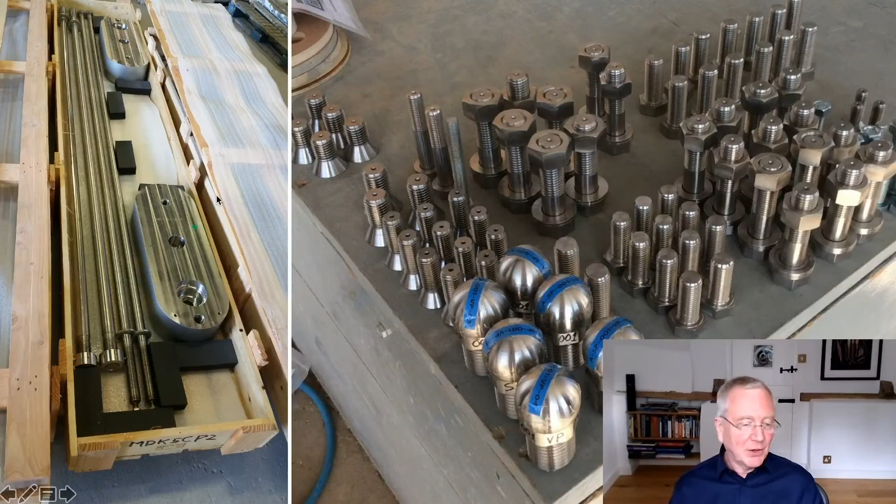On site, in reality, what happens is that there's a kit of parts produced for every panel. All the steel components are made from a very long-lasting duplex stainless steel, because we're trying to make the church last as long as possible.

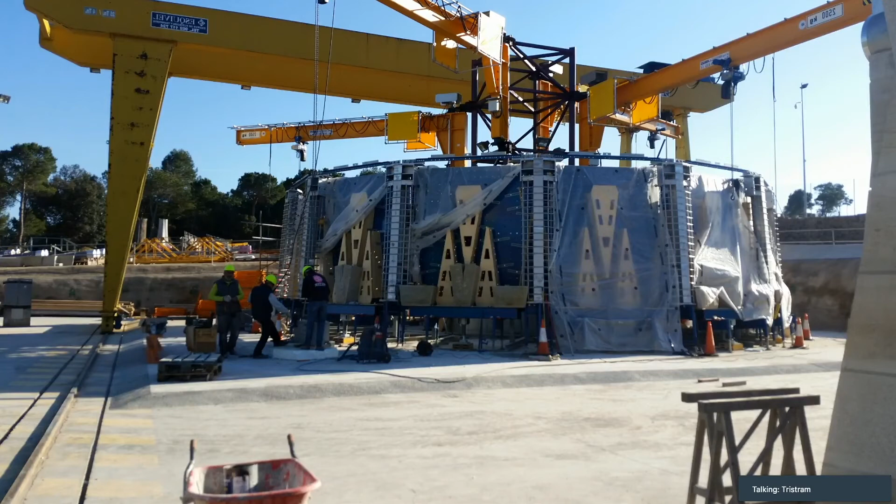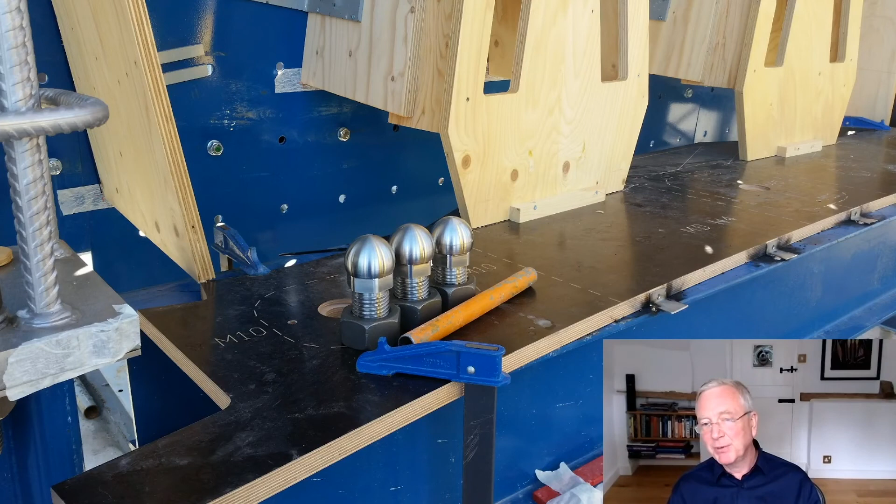They come in boxes, one box per panel, just like with your IKEA furniture. Here is the actual jig on site that makes a whole row of panels for one tower at a time. Here you can see the laser cut template at the bottom, where the shear keys are inserted. That was also used for the anchor blocks of the panel below, to make sure each panel fits one on top of the other.

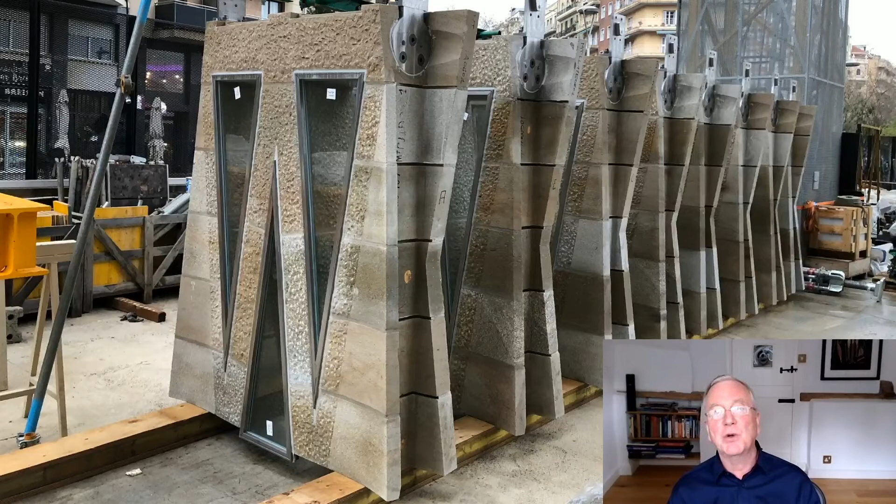Here you see stones being placed using the templates at the back, and the outcome is a set of panels, one row for one tower. This is the first installation of the first panel, on the Mary Tower, and we can see the shear keys on the right-hand side.

Now, one thing we had a long debate about was how accurately you could make these panels. I'm afraid we insisted that if they could achieve plus or minus one millimeter tolerance on the shear key into its hole in the panel above, then we would never have to do any site adjustment or surveying of the towers as they were constructed. We knew they would fit together. After a lot of reaction saying they could never make something with plus or minus one millimeter, they accepted the challenge.

And achieved it. Here you see it happening. The first panel goes into place, and they've allowed an hour per panel in their construction program. I thought the first one might take four hours, but in fact it went in 23 minutes, which was an amazing achievement. And here you see one of the big panels for the main tower, the Jesus Tower.

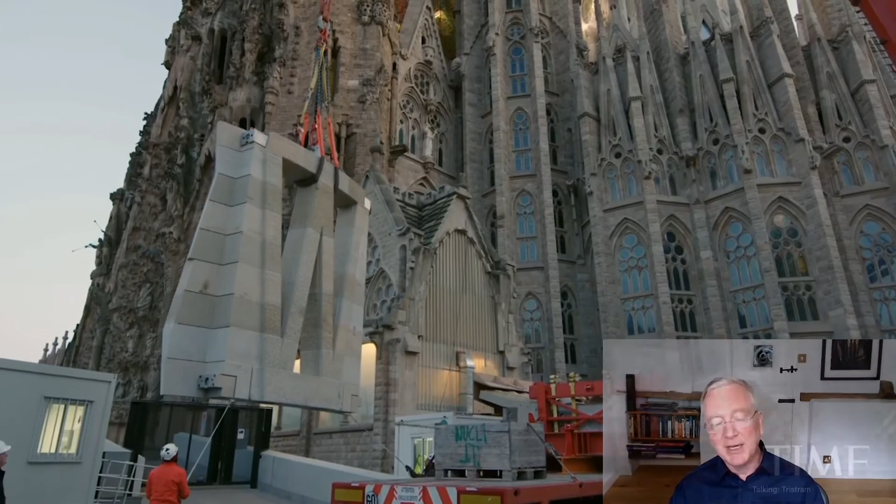These panels weigh 25 tons each. They have to be brought through the streets of Barcelona in the early hours of the morning or late in the evening, as they are a traffic hazard. And here it is lifted up - I'm grateful to Time magazine for this video of one panel being installed.

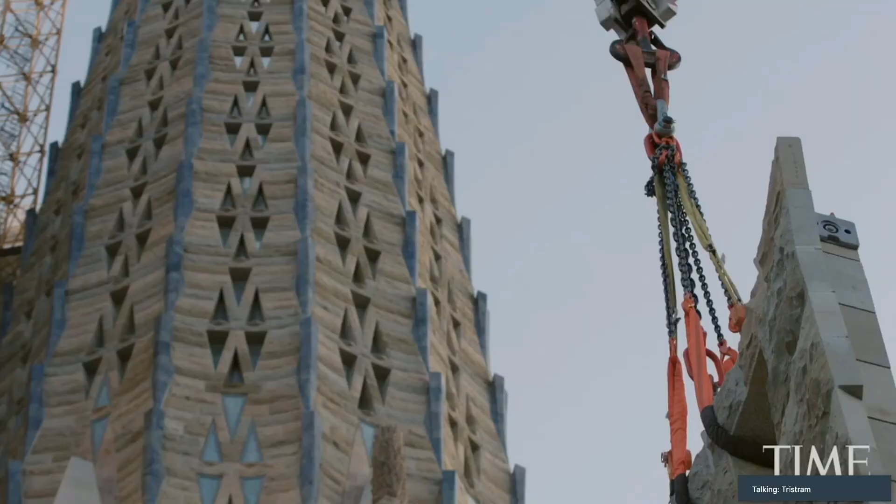I think this is something we haven't properly capitalized on, which is that the construction itself can actually be a piece of theatre. Unfortunately, this is happening at 6 a.m., when the visitors aren't yet on site watching it all.

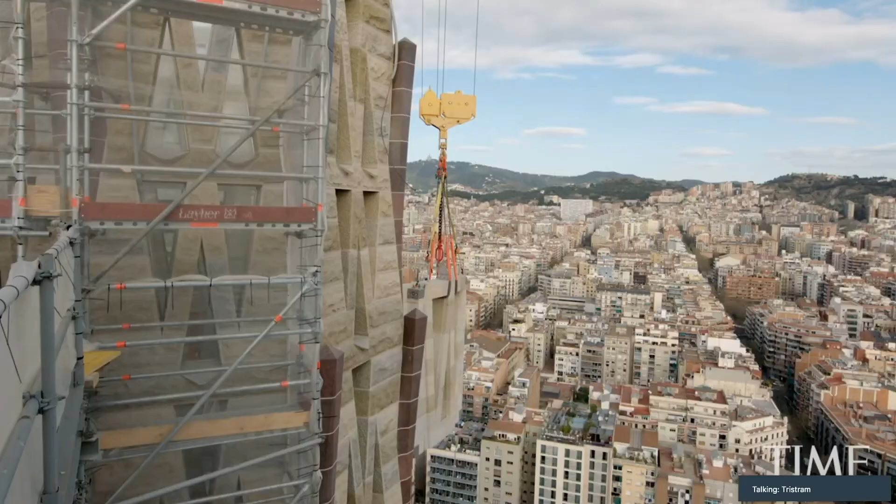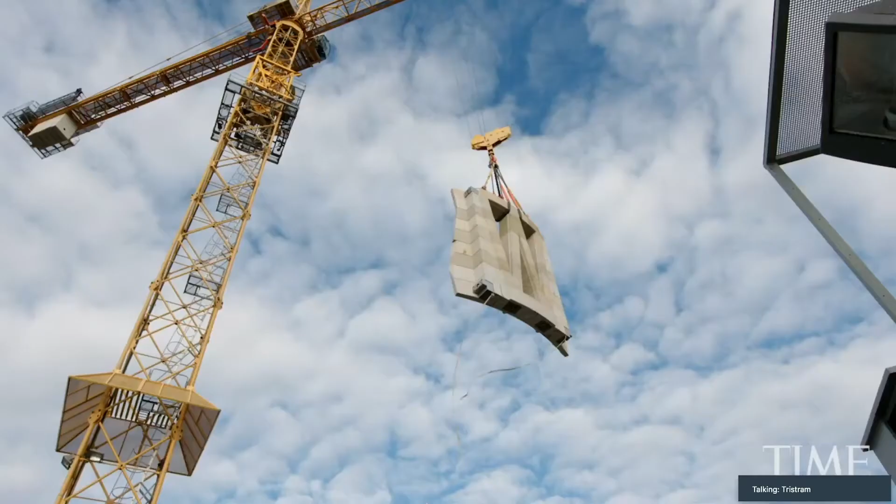But I think we should glory in what we can now do, because the panels are accurately made off-site and simply lifted into place. Even on-site, it's a quiet, dry operation - it doesn't take that many people to do it, and I think it's a fantastic thing. So even these 25-ton panels only take an hour to get from the street into place and fully fixed.

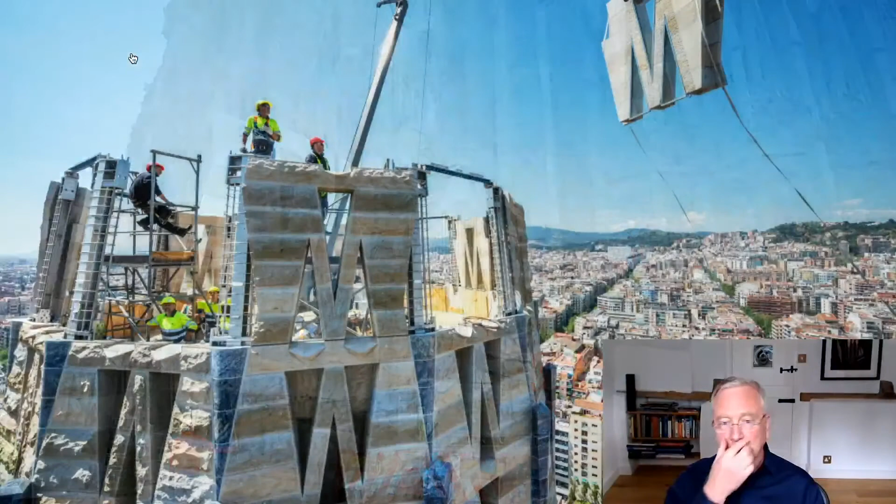We're now at the stage where a row of 14 panels for the Mary Tower can be placed in 6 hours. There's no scaffolding, no temporary support - they simply dock onto the steel columns already placed ahead of them, which are also self-supporting. And we end up with what you see in front of you.

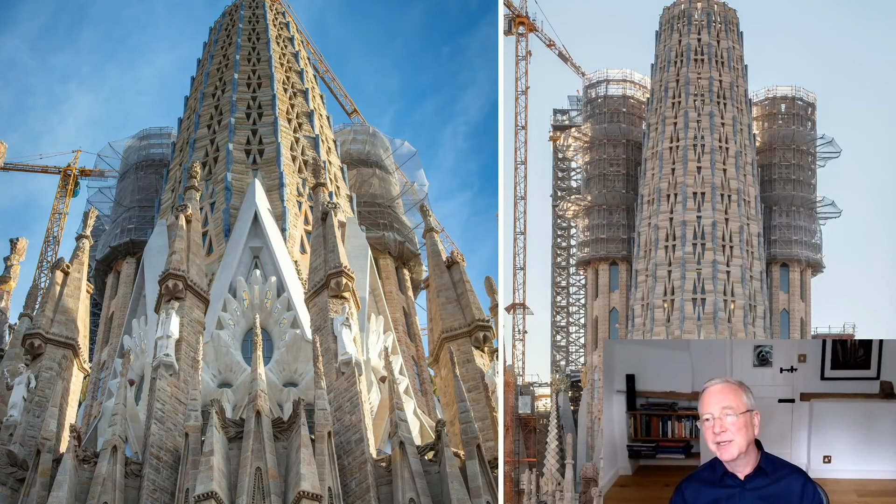These shots are now a little over a year old. There hasn't been much construction since March this year for reasons we all know about. But this shows you the Mary Tower growing nearly to its full height.

This is the inside of the Mary Tower without need for a steel skeleton, self-supporting using the thin stone post-tension panels. Here you see the whole thing, and you can see we're just now getting taller than the Nativity and Passion facades, so that the whole skyline of Barcelona is becoming altered permanently. And here's another shot looking down on all 6 towers being built at once.

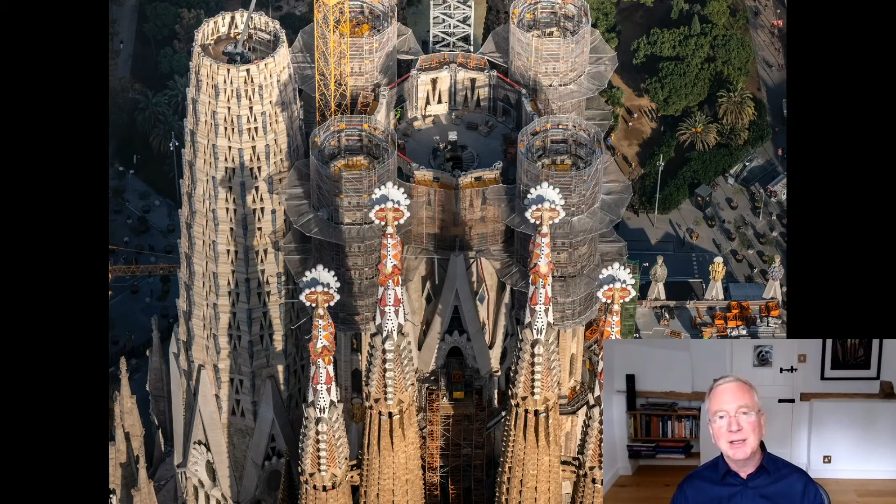I should have said that while the Mary Tower required this lightweight construction, it was deemed so successful that we're now using it on all the towers, even the ones that could have coped with greater weight.

So that brings me to the end of my talk, except to say that I cannot believe how lucky I am to have become involved with this amazing project. It's something I occasionally pinch myself about in the morning - I can't believe it's really true that I have the opportunity to contribute something to this building that will hopefully last for many years and give great pleasure to many people. So thank you very much.

Beautiful presentation, huge challenge, absolutely great. Now I open the series of questions.